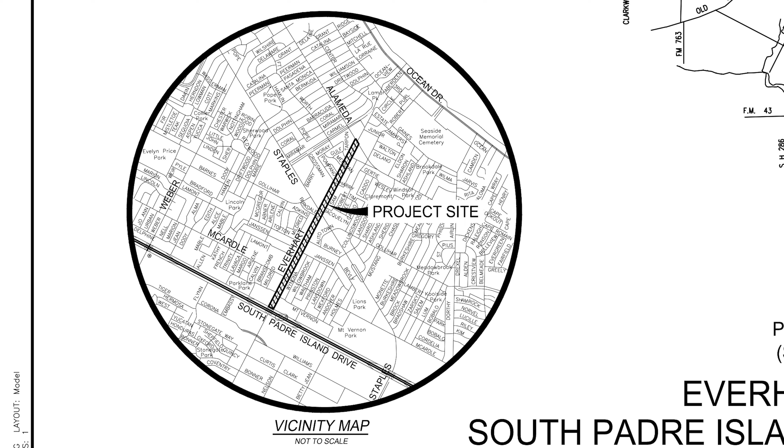And some of your projects, they'll just remove parts of the street, but for this one, for instance, we're going to remove everything, from the road to the curb to the sidewalk. We're going to be replacing fire hydrants, building new water lines, and storm and gas. So there's a lot of things that go into a roadway, not just what you see on the surface.

And so, from the private citizen's point of view, I'm sure you've heard it, like, why does it take so long, you're just rebuilding a road, right? But then when I see it driving by, I often see there's lots of pipes underneath, so are y'all also having to handle drainage and adding new pipes? Why does it take so long, I guess would be the question from the general public. And I think you alluded to that. So can you let me know, why is it so complex? Why is it so hard?

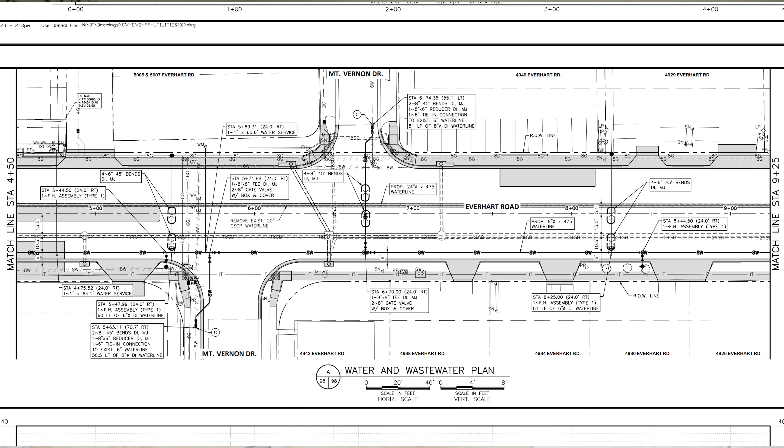Right, so in my personal opinion, about 75% of the job is underground. So once you get to the surface, it starts to go by really quickly. A lot of the trouble that we run into, especially in this particular project in Everhart, we know it's an older street. There's been generations and generations of people that lived here. And there's a lot going on underground. And a lot of times we don't even know what's underground. So occasionally we'll find a line and we won't know if it's gas or water, if it's live, if it's not. And what does take a long time is the coordination.

So we are the contractor and we're working for the city, and we'll have to coordinate with the city, and the city will have to coordinate with all of their entities. Just to make sure that, hey, we need to tap into this line. Hey, we need to move this line. We didn't even realize that this water line was here. So then that could be a setback. Oh, now we have to reroute this water line because there's storm drainage that's going on top of it.

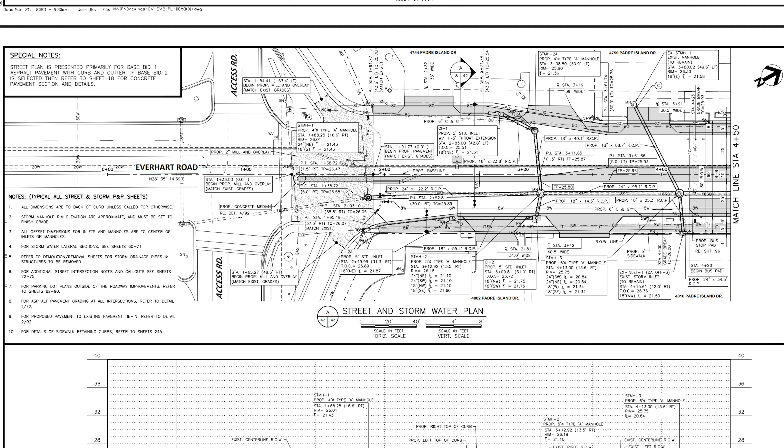And say, for instance, hypothetically, the city comes back at us and says, hey, we didn't even realize it was there, but it's active and we need it. So now they tell us, we can't touch the line. We have to go around it. Now we may need a redesign, and we have to go back to the designers. So there's a lot that goes on. To answer your question, it's a lot of the unforeseen things. If everything went as planned, it would go really quickly. But we always have to prepare for there to be delays, acts of God, hurricanes, whatnot.

So when I think of road construction, I think bulldozers, graders, dump trucks, right? Is there a professional term for that kind of work? Because I just think construction, but I understand there's house construction, massive skyscraper construction. So for this Everhart Road project, what classification of construction work, or is there a better term to describe this? That's a really good question. And I don't believe I have a straight answer for you.

So a lot of the underground, since there's a lot of parties that come into play, like I said before, where you have utilities, you have different companies that specialize in strictly utilities. Or if you have storm, you have companies that specialize strictly in doing storm drainage. There are contractors that can do it all, but that's usually not how these sort of things work.

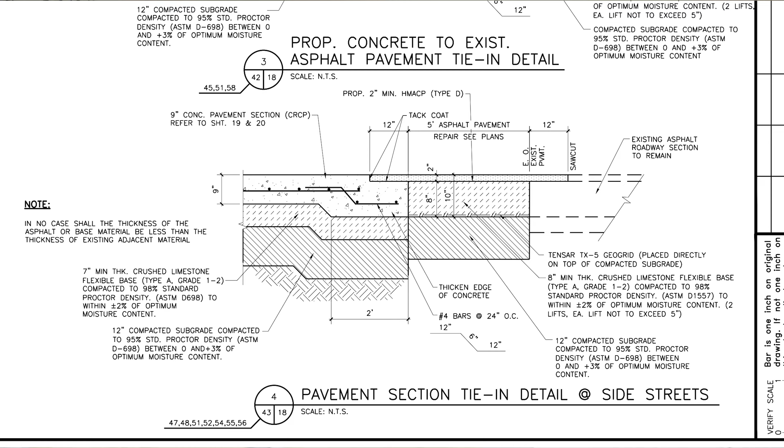And how I look at things and what I like to say to my guys and people that I work with is, I don't ever want to work on a road after I'm finished with it. In my lifetime, in my career, I don't ever want to have to go back to it. Because if I'm going back to it, it means that there's possibly failures, unless it's, of course, a widening or urbanization.

Right. So I've heard the term heavy civil construction used. Is that something that would be classified for this type of work? Again, I'm new to this, right? So if I was to go and explain it to my family, would heavy civil construction make sense for this kind of road work, or would that be something more? You're absolutely correct. It is heavy civil. So this is the heavy civil industry, and you could consider me a heavy civil survey manager, because primarily we deal with heavy civil. Okay.

Yes. And so for this particular project, since you're a heavy civil survey manager, which means you have heavy civil surveyors working, could you talk about your role for this particular project? Yeah, sure. So the good thing about us and what we do is we're always there. So like I was saying before with the underground, a survey crew has already been there. A survey crew has already surveyed it, post everything that was done prior, the preliminary survey that was done by another contractor and the engineering firm drawing up the drawings, and then the city awarding the contract to me, the contractor.

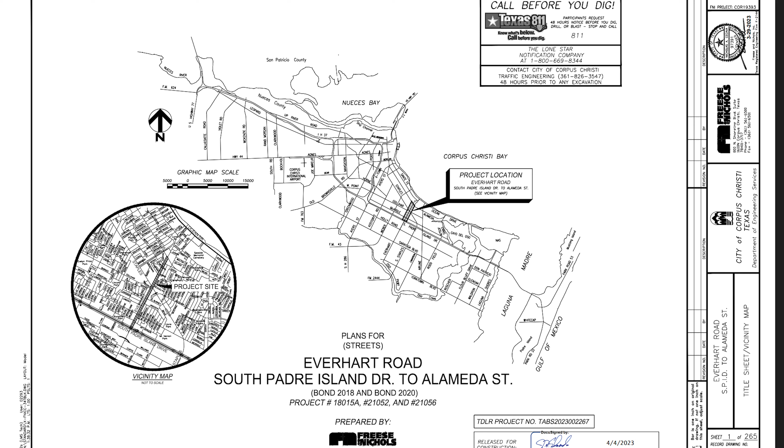Right. So a plan sheet really is a bit of a misnomer. It's a plan book, it sounds like, right? Yeah, it is. And it takes a while to really get through all this and kind of nail it down. But once you start going through a lot of these, they tend to have patterns and are pretty similar in structure. So the first thing that I look for when I get a plan set, where is it?

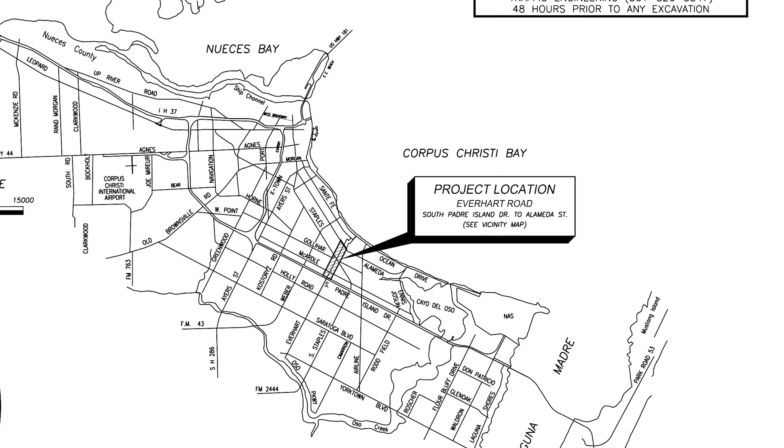So we have an overview of this is our project site. There's SPID. We know we're in Corpus. And then of course we can look on our map, and it shows that we were at Everhart at the cross section street Staples. So that's a really good idea of, oh, there's the project. I know where Staples is. I know where Everhart is. I can put it in my map if I don't, but here we are.

I also see the other companies are on here. The client, it looks like his name is on here. There's a project name on here as well. Anything else that you would reference? I know when we make drawings, there's usually a project number. So is there anything on this page that also tells us that, or do you really work from like an internal project number as well? I'm sure I'm asking a difficult question, but yeah, what else can we get off this front page?

So to be specific about it, and of course we can go into all aspects of this page. I know I said earlier 411, but it's 811. Call before you dig. That is the first thing on there, because there could be a lot of dangerous problems and safety precautions you need to take before you dig. So I noticed that. I noticed the city, the title, and then down here I can see who's the engineering firm, who built this plan set, who did the CAD drawings and all the engineering that goes into how thick the roadway needs to be or how deep the pipe needs to be, the size, diameter, thickness, everything that goes into it.

So all the engineering, we got Freese and Nichols. And then we have the city engineer who approved this. He has his stamp and his seal saying this is ready to go on this date, 3/29/2023. And then now it's awarded. It goes through a bid process, and typically with a city street here in Corpus, it's lowest bidder. Fortunately, we were the lowest bidder on this project, and we were awarded. Next is we get approval. We have a start date.

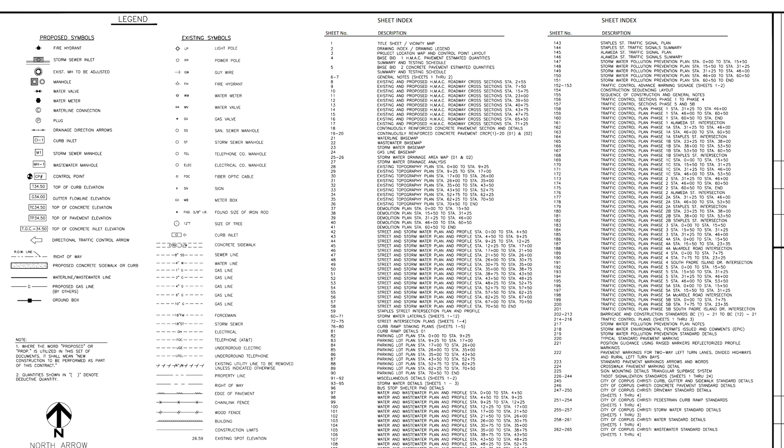Okay, so can you show me more about what's in the plan set? What's the first thing you look for? What's on page 2? How do you deal with 265 pages? Well, you got to open it up. That's a good step one. The first page is probably your most important page because it directs you where to go. So you have your index. It describes all the road work and all the different trades that need to be done. And you also have a legend, identifying some of the markers you'll see throughout the plan set that you might not be familiar with, like water valves. It has a particular icon.

So what I look for after I realize how many pages we have, I look at sheet 1, title sheet, sheet 2, drawing index, that's where I'm at. Sheet 3, voila, project location map and control layout. So let's go to sheet 3. Wow, this one's all marked up. This is one I previously marked up after we already did our level loop and our static shots on this survey.

Now I noticed a lot of red flags. You see a lot of red ink because I'm having to change a lot of things. And I typically don't like changing what's already there unless it is absolutely necessary. And if I'm changing someone else's control, then I have to notify the city and let them know, hey, something here isn't jiving.

This is the work that we put in. This is our correction to that. And is it all right if we proceed as follows? Now, I know a lot of the ins and outs. I know what they will like and I know what they won't like. So, it's usually not that bad. So I just have to make sure that everything is balanced and level and we are ready to go.

Right, so you said the first thing you'll do is you check the work, right? And so I think this is a good example of that because everything that is in black was original, if I'm reading this correctly. Correct. Everything in red looks like it might be a problem or a difference. Yes. Okay, and then I see some green, so I'm assuming that means we're good. Yes. But I'm also seeing some blue lines and green.

Sure, yeah, there's a lot of things behind just what's marked up in here. So there's a lot of data backing up a lot of the call outs and indicators that you see on here, which is what I personally marked up. So I chose different color schemes to pop out differently than red and green, right? Red's bad, green's good. Now here we have an assortment of colors. Now this is referring to our level loops that we ran.

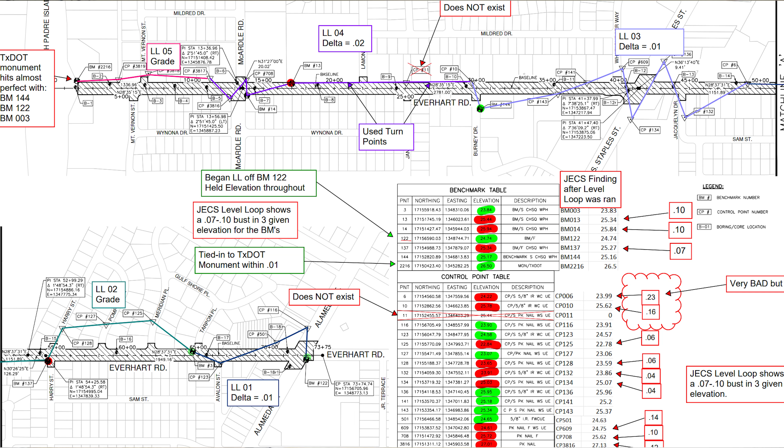Since this is such a long project, being approximately 2 miles long, to run a level loop from one end all the way down and back, it just doesn't make sense. And every time you do another setup, you're increasing your chance for error, as you should know. And so we try to eliminate that. So we try to take small bites of it. So what we were able to do here is we did 5 separate level loops. And we piggyback off the last level loop.

So here we have the first level loop, and if this level loop wasn't ran correctly and it didn't close out, because we'll do a closed level loop, then I'll just simply have them do it again. If there's a problem there, then we have to really check our instruments, make sure that they're calibrated correctly. There's an assortment of tests that we can run on our own instruments. If they need to be sent to a lab, we can send to a lab or get a new one. We got to do it right, because like I said, the second most important thing. So we've jumped from level loop to level loop, and we did 5.

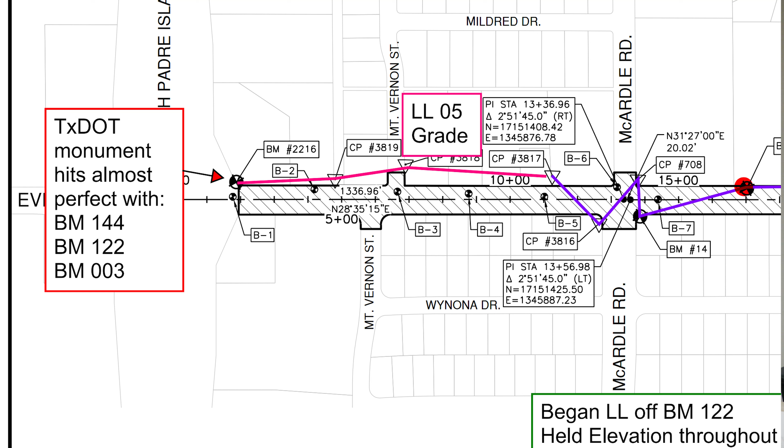So I want to point something out here and why I was so happy. Even though we got all this red markups, this happens every project. I'm always marking stuff up in red, and I might not always be right, but I do find discrepancies, and this party isn't here to tell me how and why they did it. What I see here is I'm looking at a TxDOT monument. Now this is a monument that is used for TxDOT on SPID, and it's also a monument that has probably been used for the city and everything that they built over here. And TxDOT's saying, hey, this is good.

So it gives it a little more credibility than seeing, say, a control point where they'll have the abbreviation CP. And there's other control points in here that pop out a little bit more than the others. But what I noticed at this end of the project is the monument by TxDOT, and on this end of the project we have a BM122. Not sure where it came from, but that's a good start and end point that we have. So we were going to go ahead and say, you know what, we have to call an elevation good even though it might not be, because all the delta, all the math is going to work the same when you run a level loop.

So you could start at elevation 0 or 100, and after the level loop process, we'll know the difference in all the elevations along the corridor, and we'll be able to either raise it all up at once or lower it all at once. You never want to take it in individual parts, right? So you want to always level loop.

With this, we just called this benchmark good. Even though we weren't confident that it was good, we still needed something to run with. So we ran with BM122. And as we're going throughout the corridor, we're jumping, banging off all these other points and setting up turn points if there's too much of a distance, or we would find there's areas where the control points no longer exist, we weren't able to find.

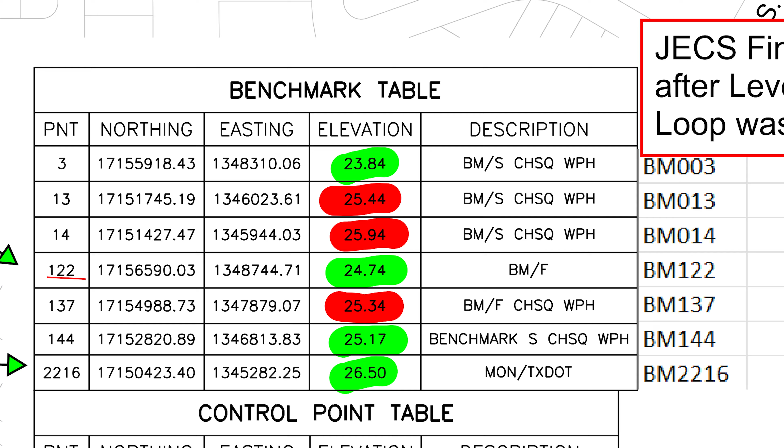This was all done. We try to locate all the points first, but when I made it all the way down to SPID where the TxDOT monument was, I noticed that I hit the control point elevation that was given. So you're telling me if I start 2 miles away, start here, and I end 2 miles away, no matter how I broke this level loop up, I'm hitting the same elevation within a hundredth. A hundredth is good for our terms.

Two hundredths is okay. Three hundredths, we need to start questioning it. But I'm on the money, so I'm within a hundredth. So I'm at the thousandth. So I am perfectly fine with this. Now there are other checks that I'll have to do. I'll take all this information and I will go ahead and put it on our JECS pre-construction survey. So this is a pre-construction survey.

Now there's a printout sheet that we'll give to the surveyors themselves and they can fill out a lot of the information. They do have their own field books where they document all their level loops and their task at hand, and so they could refer back to. But this is something that's primarily done in the office on the manager side. So what I do is I'll take their level loop, I'll take their field book, and I'll make copies. And I'll actually have the surveyor sit down with me, and we'll go over his entire level loop.

I'm not going to assume; we're a team. We're gonna think about every point we hit. We're gonna identify it. If there's a bust, we'll figure out the bust. We're working together, right? Not only me, the party chief, and his assistant. And that's how I'm able to get all this information down on here. Now I start running an Excel check on all of his math.

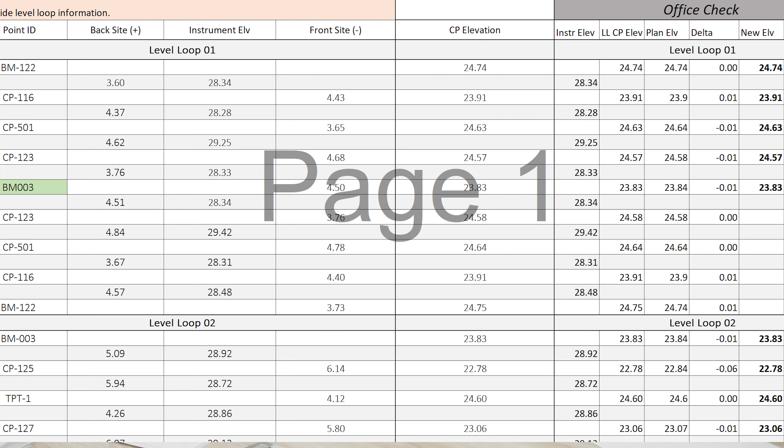This is all the surveyor's math put down, and we start at the one level loop, which you can refer to right here, where you have level loop 1. I started on, you can check me, BM122. Check. All right, and my last shot before I turned was BM003. I see BM3 here. BM3, and then I came back to BM122. Check. And that was one level loop. I believe it's in a different color right there, different from the second one. It is. I see it as a dark blue here.

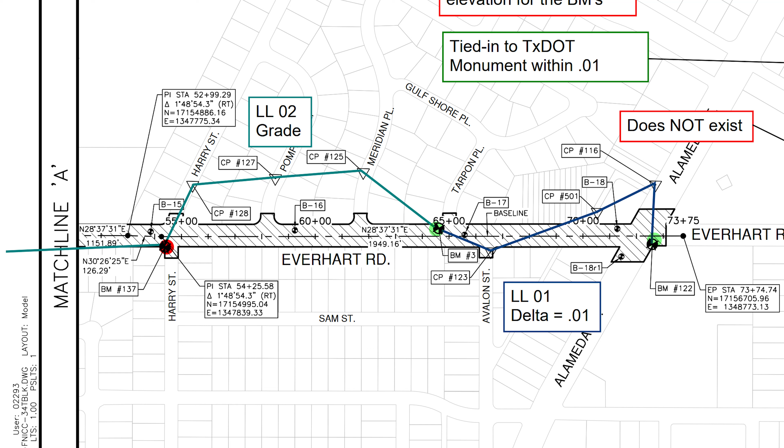And then I'm seeing that at BM3, I bet you started your second level loop. Correct. Okay, and then reading the plan, you went through control point 125, a few others, and then, if I'm reading it correctly, you may have ended at BM137? Close. We actually turned on CP006. CP006. There's a continuation of that color. Let's check. And there it is.

There it is, CP006. Okay, so what's interesting is we've got this on the third page here where we have our control. We've got the beginning, and since that road is too long, there's this thing that says match line A. Correct. That tells me, here I also see match line A. This is where I continue. You're absolutely right. Okay, so now that makes sense, because when I'm tracing this line, it's the same color, so that should have been my first notification that it's still the same level loop. I do see that here, CP6 is where it continues. Okay. That's correct.

So then can I try one more? Sure. Okay, so then for level loop 3, we're starting on CP6. Yes. And I'm tracing your line, so you go to CP 132. It's obscured here, I think 136, 134, 609, 141, 143. Let's see here. I believe we end on 144, or would it be CP10?

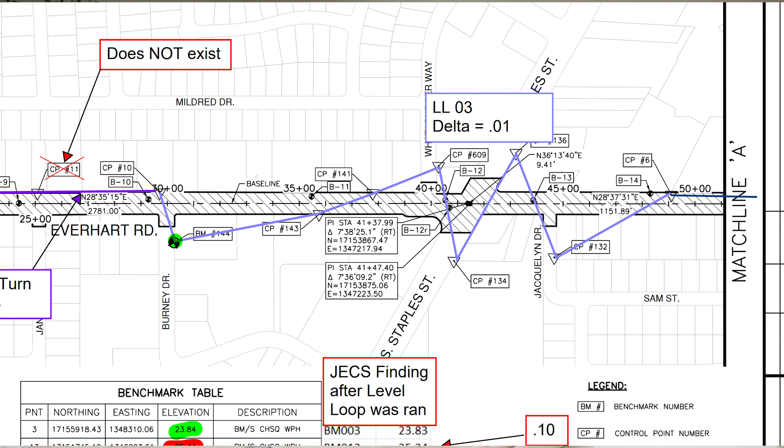CP10. Okay. So I only see like 3 colors, and that's purple and blues. But I knew we were close. So you're going through a lot of control points and benchmarks here. So, I mean, that's a lot.

So how do you decide, or so the previous surveyors were setting these control points and you're retracing it, or are you also setting some at the same time? Can you talk a little bit about how these control points got here, and how you use them, or do you create them? That'd be good to know, because there's a lot.

There is quite a bit of control points, and you'll see later that we create control points off of their control points, and we'll eliminate control points. And there can be situations where there's too many control points and you don't know what to use. With this, the control points that were given by the previous survey team, they knew that there was going to be a project, right? So the engineering firm needed to get a survey done on Everhart so they could construct a project digitally.

When they got the survey team out there, they also know that they have to prep for other people to construct. So they'll do us the favor and they'll set some more control points. So that would be a BM, which is a benchmark, a CP, which is a control point. There are other previous control points done by other people. Maybe Nueces County set some control points, which we've went to, and also the TxDOT control point, as I stated before.